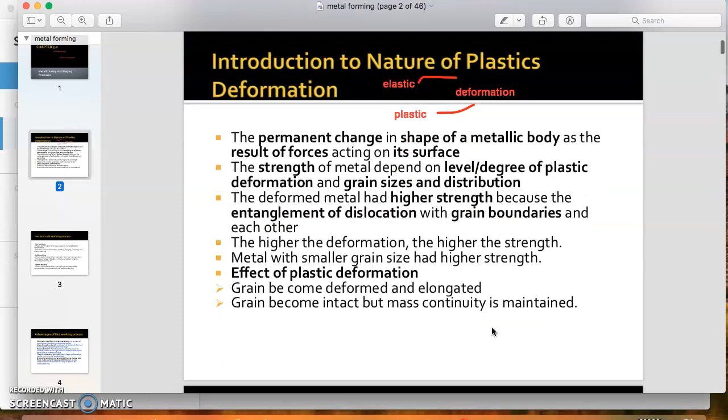In metal forming, there are two working conditions we can use. The first one is hot working, and the second one is cold working. Hot working means that the forming process occurs at a higher temperature, normally above the recrystallization temperature but not up to the melting temperature. Okay? So below the melting temperature but above the recrystallization temperature.

Processes involved include extrusion, welding, forging, drawing, and rotary piercing. We will discuss these processes in a later lecture. In the cold working process, the deformation occurs at normal room temperature. No heating is required. Processes involved include bending, rolling, extrusion, forging, shearing, drawing, etc.

Why are there two types of working environment? This is because there are a lot of parameters we should consider in choosing hot working or cold working. Mainly, metals have two types of properties: they can be ductile, or they can be brittle.

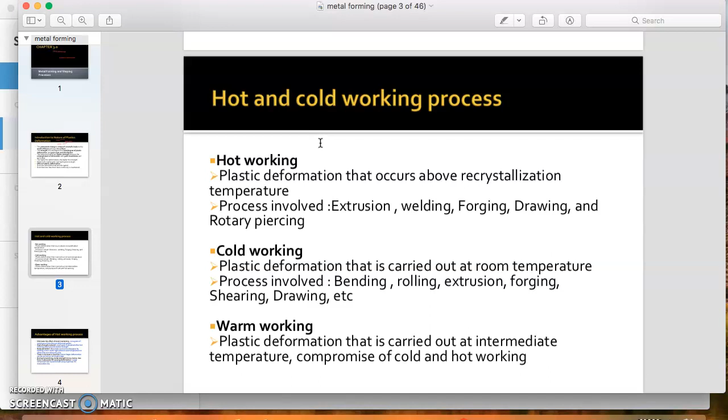Usually, if the metal is ductile, you can choose the cold working process because ductile material is very soft. But for brittle material, the suitable process is hot working. Brittle material usually has high hardness and high strength, and when we apply heat and increase the temperature, the metal will change its properties from brittle to ductile. The ductility of the metal will increase.

Okay, there are advantages of the hot working process. In hot working, when we increase the temperature, the metal strength is low, hence less force is adequate for causing the deformation. So when the ductility of the metal increases, it becomes soft, and we only require a lower force to deform the metal.

So increase the ductility. And also we can reduce the defect. Usually inside the metal, they have porosity, sand pores. And when we apply the heating process and then we apply the pressure, the pore will become smaller and maybe can be reduced. And then we also can get the high strength of material because we are able to obtain the small grain. The smaller the grain, the better the strength of the material.

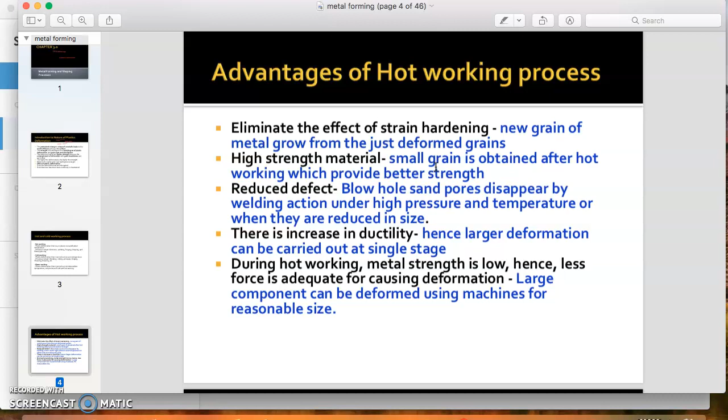But hot working also has disadvantages. The first one is there will be scaling or rapid oxidation occurring on the surface of the workpiece. This is because when we apply heat to the metal, at the surface of the metal it will cause oxidation to occur. And then the product is less precise. This is due to the thermal contraction and warping from the uneven cooling.

So when we apply the heat, the metal will expand, and then when we reduce the temperature, the metal will shrink. So it is difficult for us to get a high accuracy product. And then maybe we will get an uneven grain structure, and it is an expensive process because we require a heating unit to heat the metal.

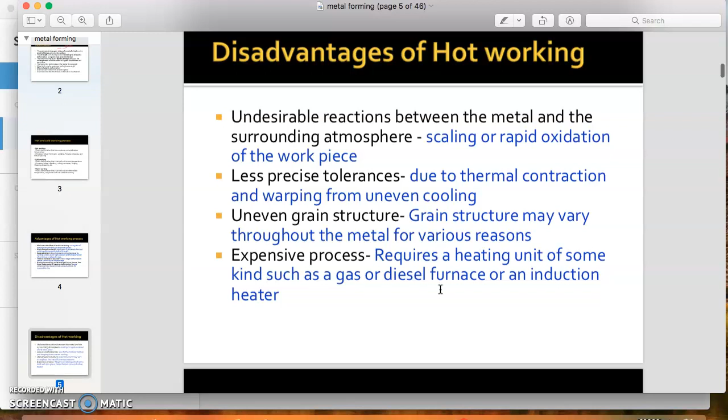Okay, for the cold working process, there are several advantages. The first one is no additional heater required. Of course, there is no additional money that we have to spend to buy the heater. And then we can get a good surface finish of the product because no oxidation or scaling occurs. And then we can reduce the waste as compared to machining.

The idea of reduced waste as compared to machining is that in machining we will get scrap. Chip is a scrap, and scrap is a waste. But in cold working, no scrap or chip is generated. And then low production time, and because of low production time, we can use this method for large production. If we get a greater demand, high demand, we can opt for the cold working process. Why low production time? Because no heating is required.

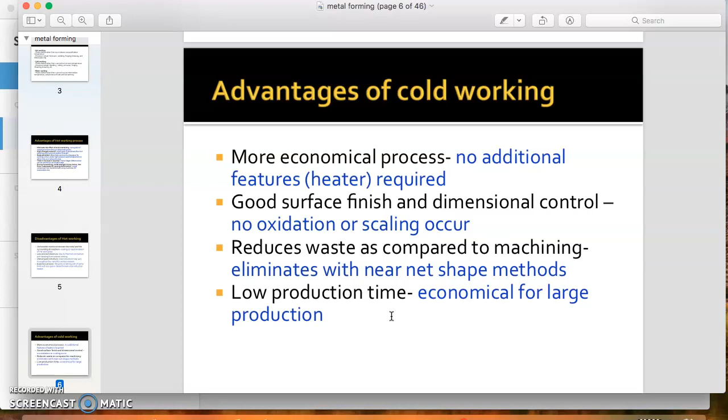But cold working also has several disadvantages. The first one is we require greater force. Because the metal is at room temperature, the strength is higher, so we need a very high force to shape the metal. Expensive tooling, because the tool needs to apply high force, so our tooling must have high hardness and high strength. So the tool is quite expensive.

And complex process, the surface must be clean and scale free. But cold working is only suitable for large production volume. If we have a lower demand, better we choose another process, because cold working needs high capital cost on the tooling, especially on the die. And cold working is more suitable for material which is more ductile. Means the metal is soft, more ductile. For brittle material, it's impossible to apply the cold working process.

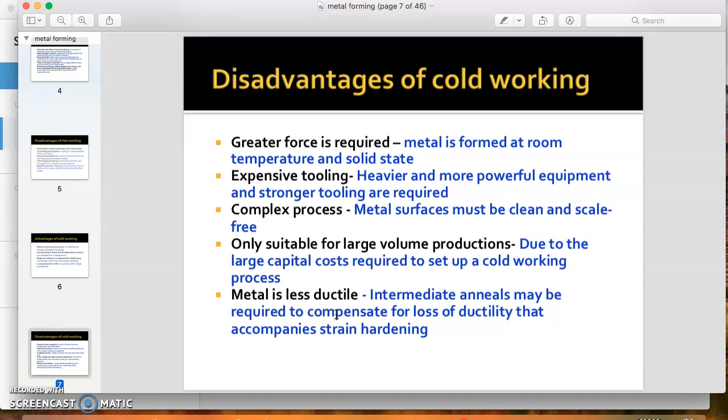Other products made from the metal forming process are such as the connecting rod, beam structures, I-beam, H-beam, L-beam, which are used in the construction industry, which carry high load to support the building.

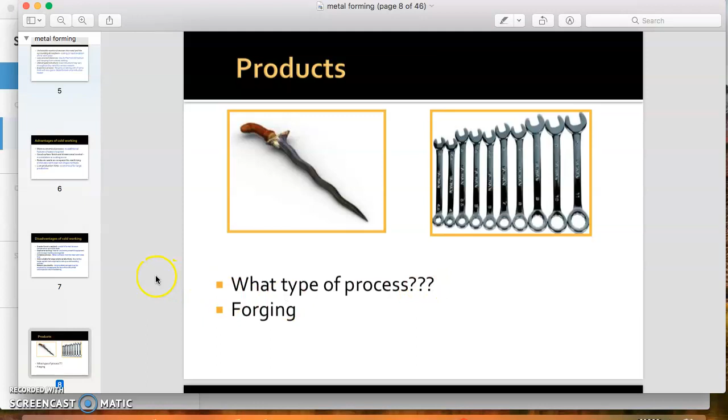Okay, thank you very much. And in the next process we will discuss the specific types of metal deformation process.